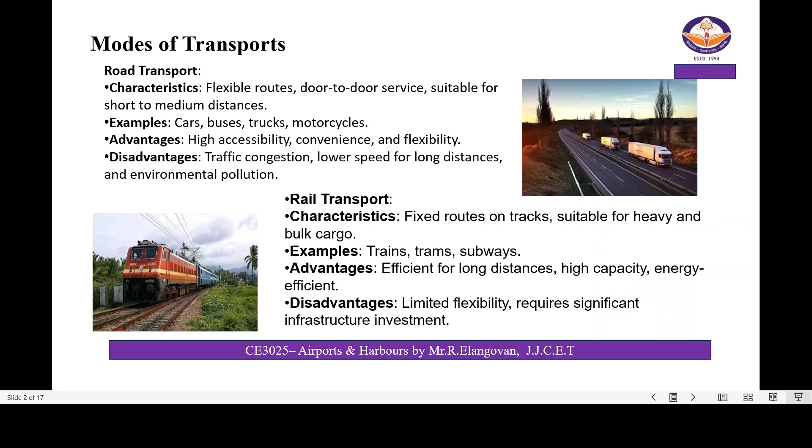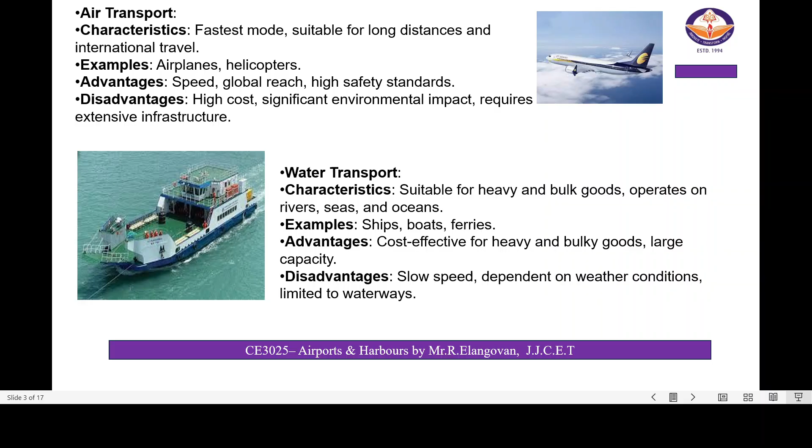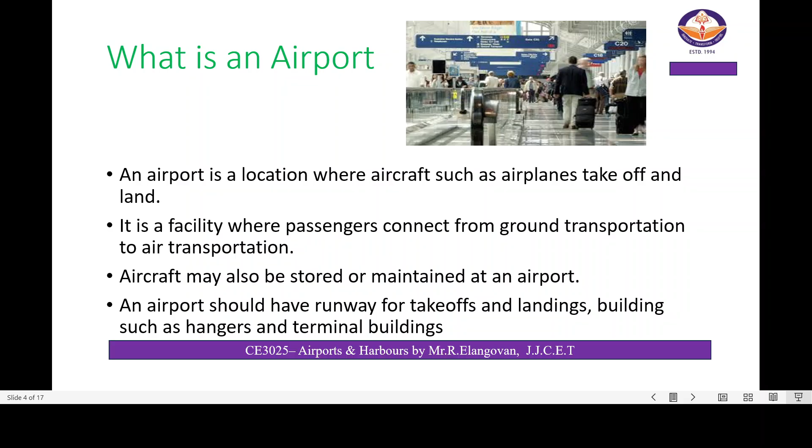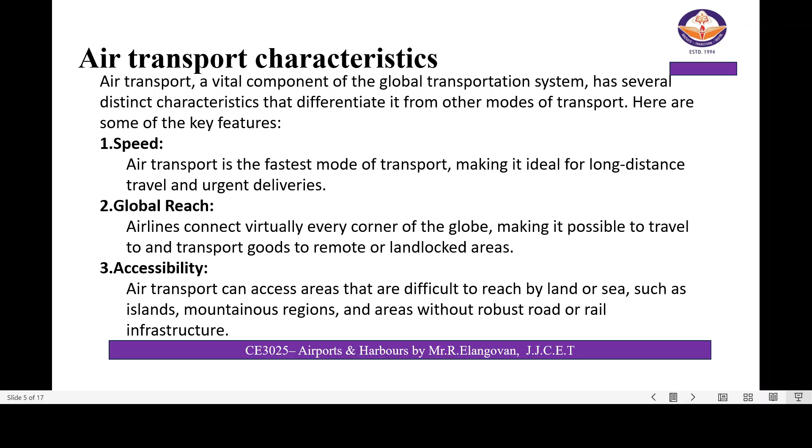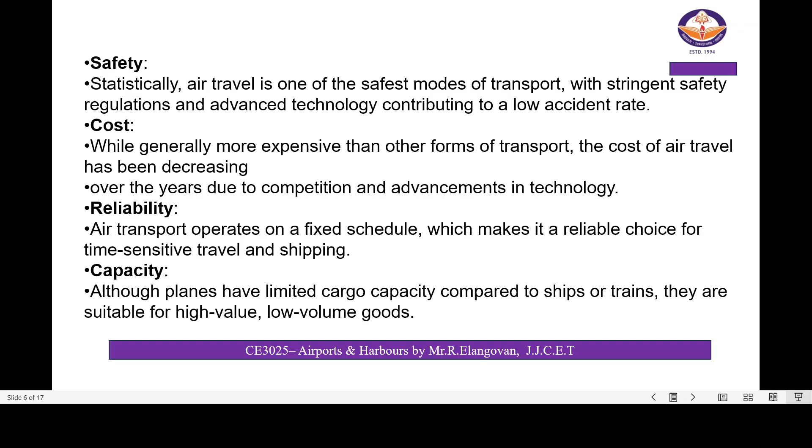The cost of air transport is very high compared to other forms of transport, though it has been decreasing over the years due to competition and advancement in technology. Reliability: air transport operates on a fixed schedule, making it a reliable choice for time sensitive travel and shipping. Capacity: although planes have limited cargo capacity compared to ships or trains, they are suitable for high value, low volume goods.

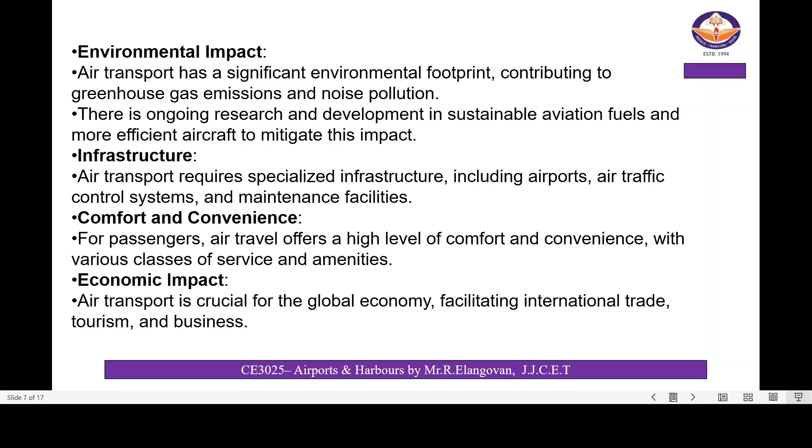The air transport infrastructure, including airports, air traffic control systems, and maintenance facilities, will be good for all types of airports. Comfort and convenience for passengers and employees working in airport services will be at a high level, with various classes of services and amenities also provided. The economic impact includes global economic facility, international trade, tourism, and business.

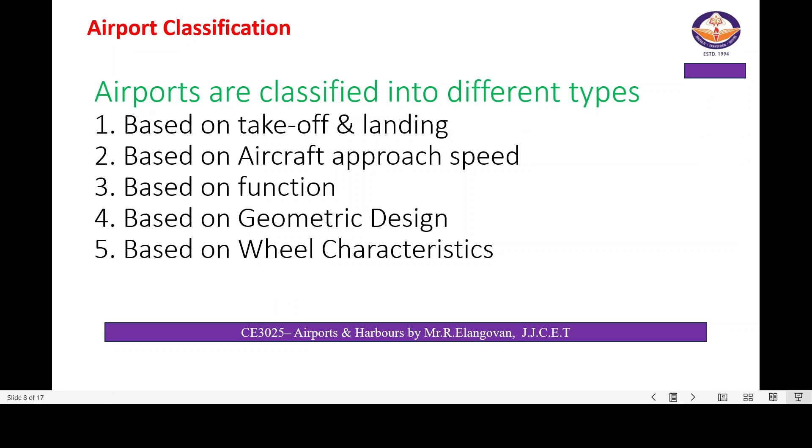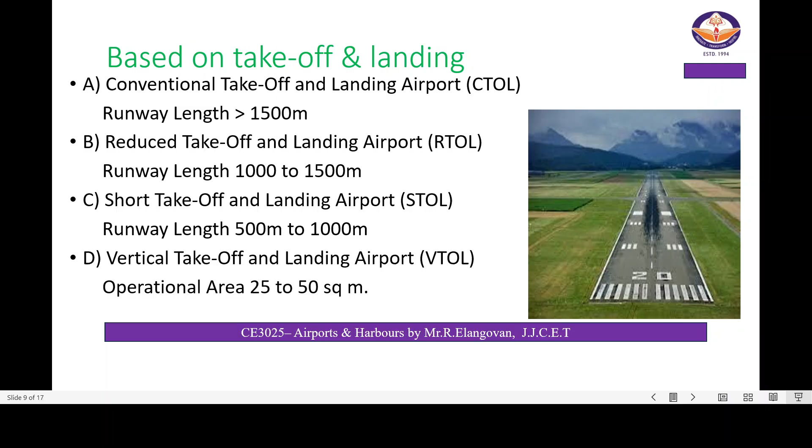First, based on takeoff and landing flight runway length, airports can be classified into four types. The conventional takeoff and landing airport has runway length greater than 1500 meters. The reduced takeoff and landing airport has runway length 1000 to 1500 meters. The short takeoff and landing airport has runway length 500 meters to 1000 meters. The vertical takeoff and landing airport has operational area 25 to 50 square meters. These are the four types based on takeoff and landing operations.

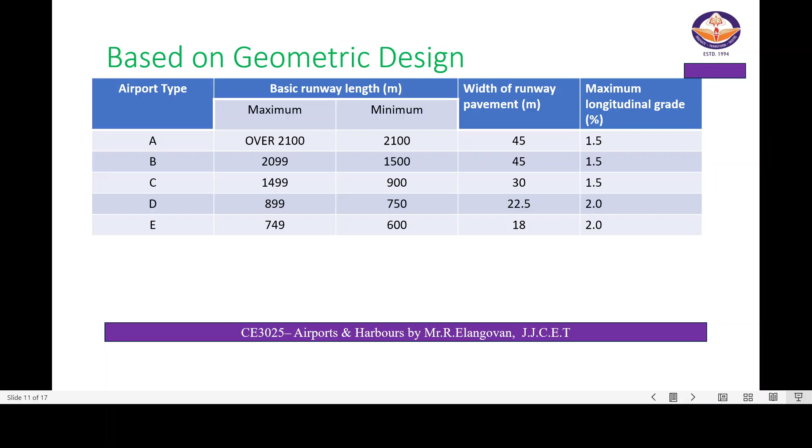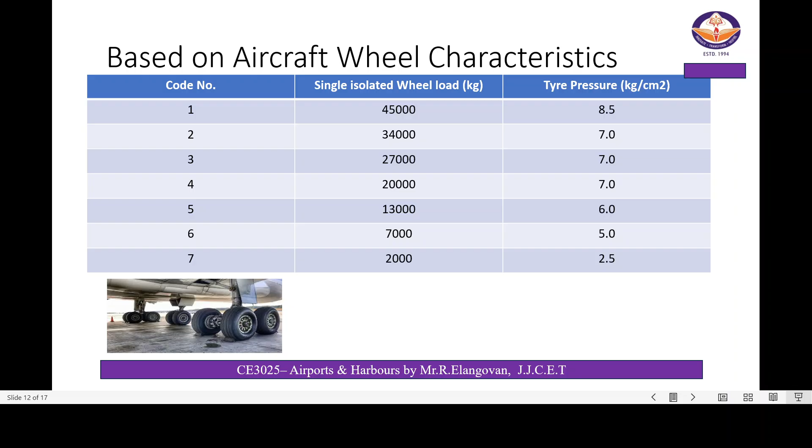Based on aircraft wheel characteristics, we have 7 codes. The single isolated wheel load is up to 45,000 kg with tire pressure of 8.5, classified into 7 types. The last one is 2000 kg with tire pressure of 2.5.

So we have generally classified three types of airports: international airport, domestic airport, and military airport. In an international airport, airports have customs and immigration facilities to handle international flights only. In a domestic airport, airports handle flights within a country and typically do not have customs and immigration facilities.

Next we will discuss ICAO, which stands for International Civil Aviation Organization. It is a specialized agency of the United Nations that sets international standards and regulations necessary for aviation safety, security, efficiency, and environmental protection. ICAO headquarters are located in Montreal, Canada. This organization works with 193 member states and industry groups to develop international civil aviation standards and recommended practices.

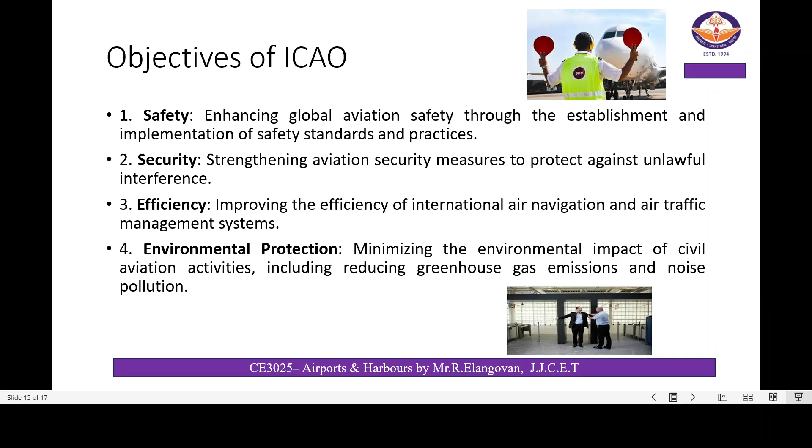The objectives of ICAO are: safety, enhancing aviation safety through establishment and implementation of safety standards and practices; security, strengthening aviation security measures to protect against unlawful interference; efficiency, improving efficiency for international air navigation and air traffic management systems; environmental protection, minimizing the environmental impact of civil aviation including reducing greenhouse gas emissions and noise pollution; and economic development, promoting sustainable economic development of the international air transport sector.

The standardization function of ICAO involves developing and updating international standards and recommended practices to ensure uniformity in regulation and procedures across member states. Cooperation involves fostering international cooperation among member states and industry stakeholders to address common challenges and opportunities in civil aviation. Capacity building involves assisting member states in building and enhancing their aviation capabilities through training, technical assistance, and knowledge sharing.

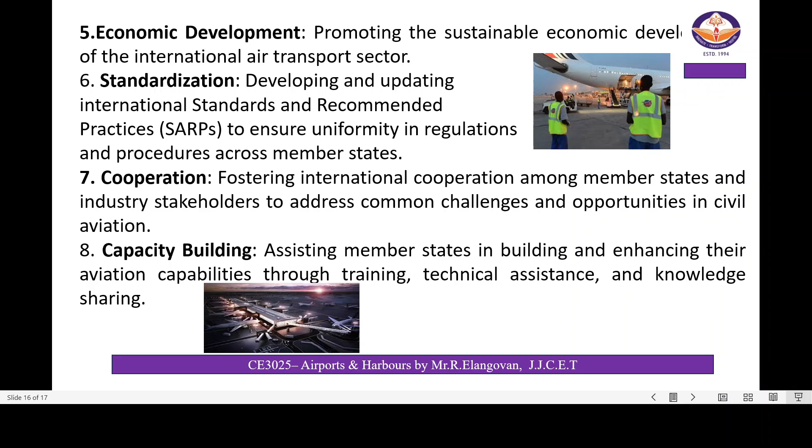So these are the topics we will discuss about airport planning.